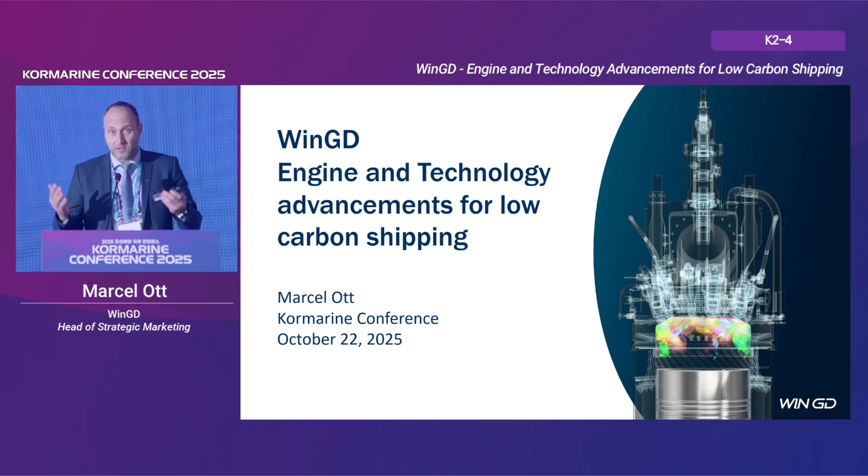I'm going to tell you something about WinGD's engine and technology advancements for low-carbon shipping, which is one of the very actual topics that all of us in this industry cover as of today.

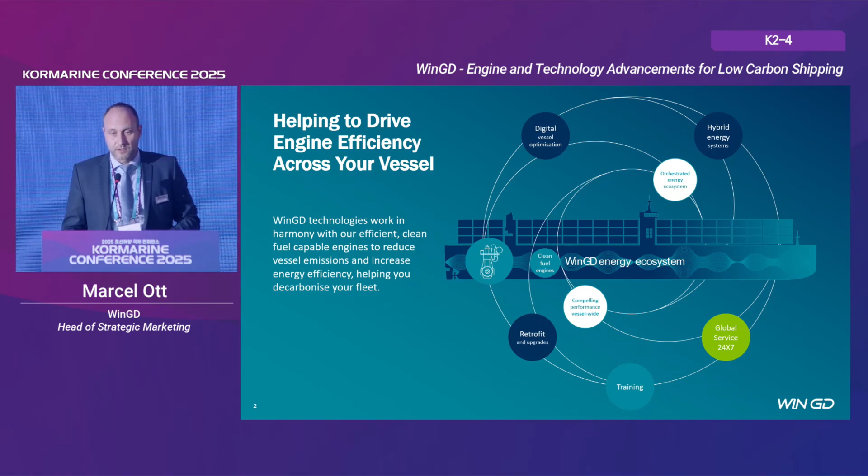WinGD is mostly known as a main engine designer, as many of you probably know. However, we also offer an extended range of technologies and solutions to support the decarbonization of the maritime industry, not only with engines, but also with other technologies such as hybrid power systems, or digital solutions that help to monitor operations and decarbonize or reduce fuel consumption and emissions overall.

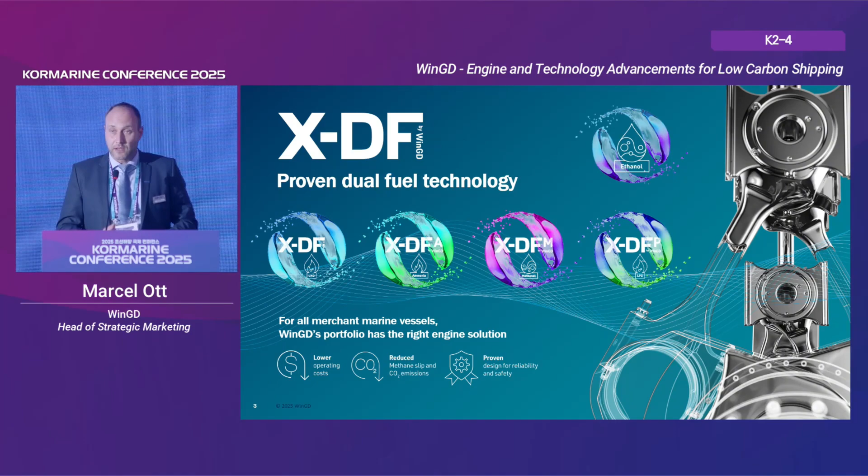In today's presentation, I would like to mostly focus on what we call future fuel or alternative fuel engines. We have the XDF LNG engines to start from, which is a very much established solution. On top of that, we have also introduced our XDF-A ammonia, XDF-M methanol, and XDF-P LPG burning engines. And just to add the latest one to this list, the ethanol burning engines, I will also have a word on that as we continue.

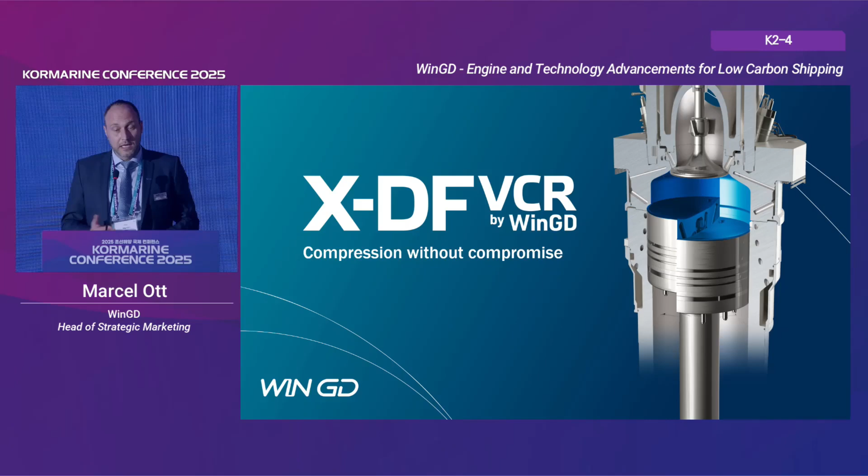So let's start with the LNG dual fuel and this variable compression ratio technology or device that we have introduced to this series of engines. It's actually quite much a groundbreaking technology that we have available for these engine types, because it gives flexibility that has never been there before on any combustion engine, basically.

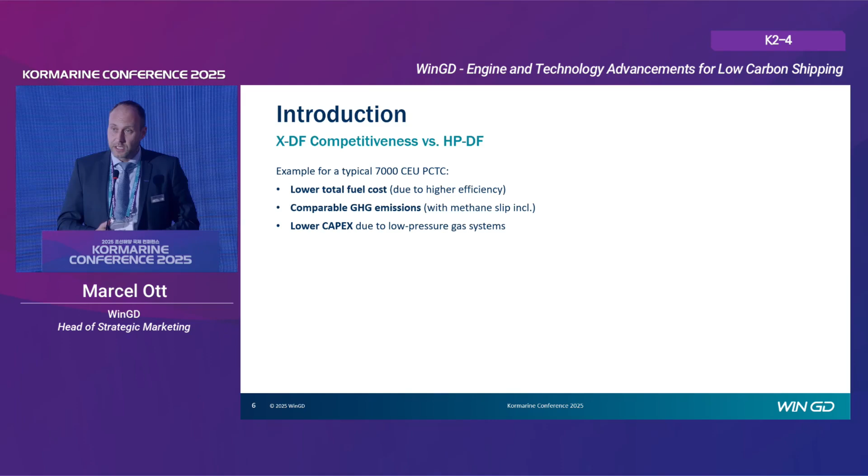The main target of this clearly is to offer the most competitive solutions in terms of LNG dual fuel. If we look at some of the main competitiveness parameters, as you can see here in a comparison of a number of versions of our low pressure lean burn Otto cycle engines compared to the high pressure counterpart, you can see that with this latest generation we can offer lower capex because they're still based on the low pressure gas supply system, which is more simple and more cost effective.

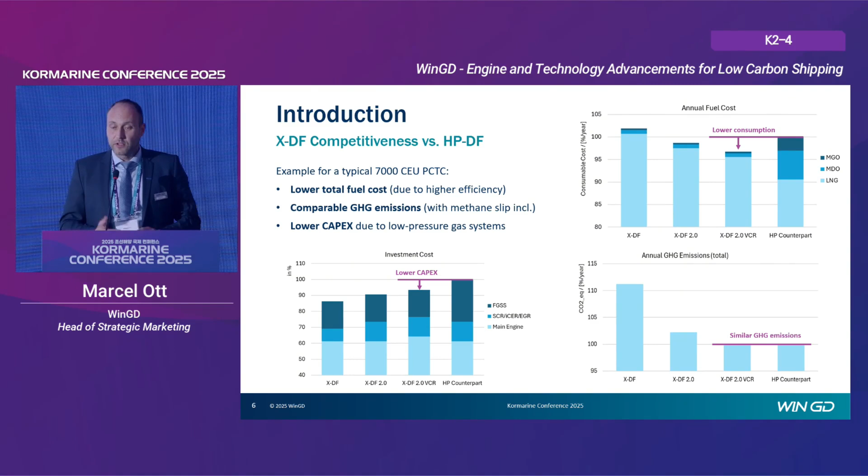We can lower overall fuel consumption, which is a surprise to many, but we see the technology is very effective when it comes to reducing fuel consumption. And even if we include methane slip, in terms of greenhouse gas emissions, the solution is very competitive.

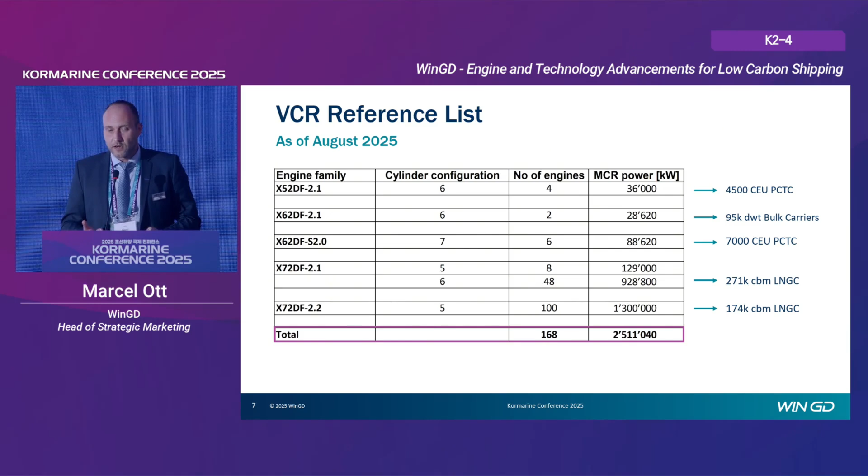We have seen a very good market uptake of this technology after its introduction. Our engine builders have contracted almost 170 engines with VCR technology in the last couple of years.

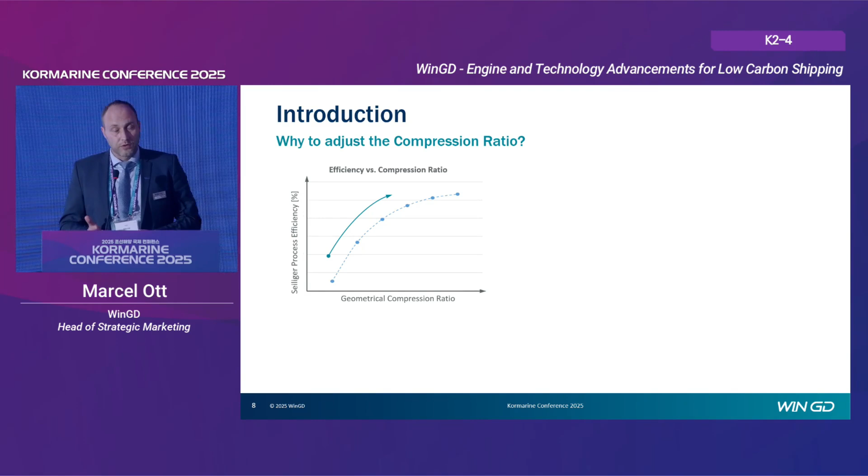First of all, why do we want to adjust the compression ratio on an engine? In very simple terms, on a combustion engine, the higher the compression ratio, the higher the efficiency of the engine and the lower the fuel consumption. So there is an interest to maximize the compression ratio of an engine.

That's a bit of a compromise, especially on a dual fuel engine that runs on two different types of fuels, where on a conventional engine without variable compression ratio, you always have a bit of a compromise in selecting the best compression ratio for operation on either fuel. That's an advantage with this VCR system.

We can maximize the compression ratio for any kind of operation. You can see here on this picture an example of the piston position at minimum and maximum compression ratio. That's the range we can use to optimize operation in any fuel mode, under any ambient condition, and with any gas quality. So it's an automatic optimization that takes place during the operation of the engine.

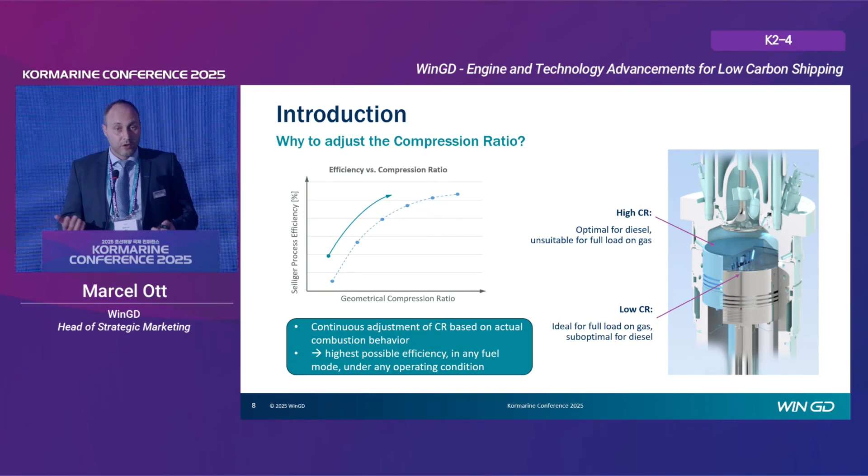There are a few main advantages or benefits with this technology. First of all, obviously reduced fuel consumption, and here you can see two illustrations showing the consumption savings in diesel and gas mode. We're talking about quite significant savings. In diesel mode, something like 6 or 7% of fuel savings, so it's quite significant. And also in gas mode, in part load, we have reduced consumption.

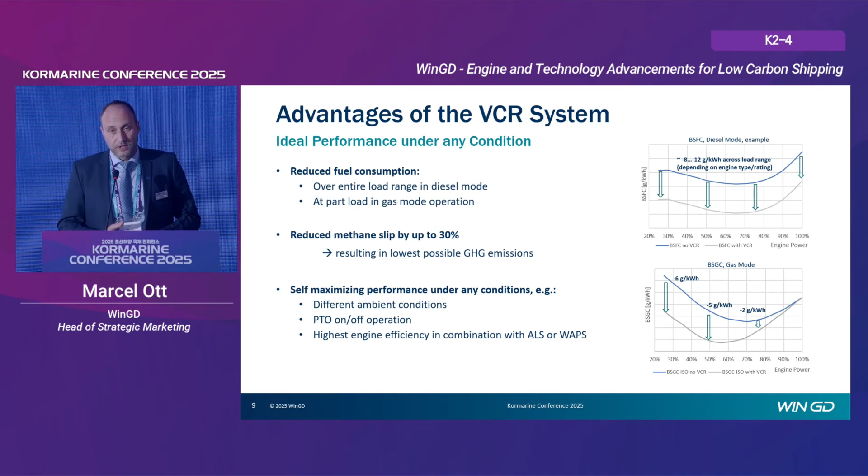We have seen reduced methane slip of approximately 30% compared to previous generations of engines, which results in lower greenhouse gas emissions. We also have additional flexibility to maximize performance under different operating conditions. These two pictures show how this mechanism looks like.

To the left, you can see this knee lever connection feeding hydraulic oil into the crosshead of the engine. Inside the crosshead pin, we have this hydraulic mechanism that consists of something like a hydraulic piston inside the pin.

By controlling the filling level of this lower chamber, we can adjust the position of the piston fully variably during operation of the engine. And that actually happens automatically, so the crew does not need to do anything besides just making sure that the system is activated.

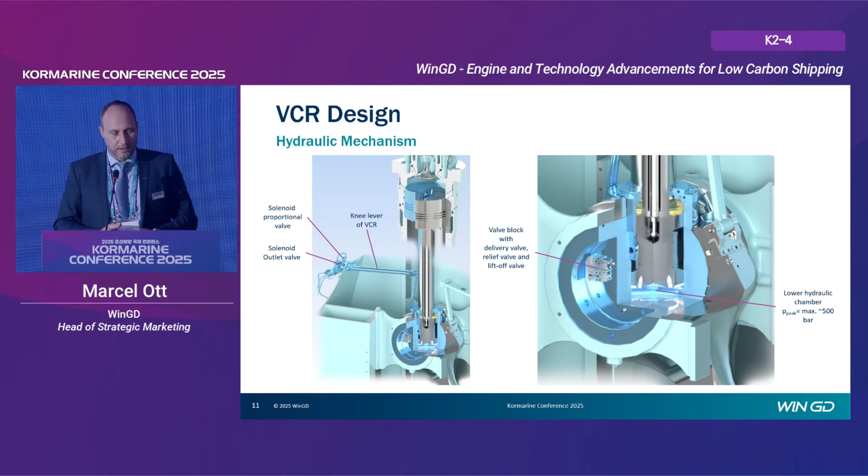The status of the introduction of this technology is that our engine builders have started to deliver a number of engines. Different types of engines have been delivered from Japanese, but also Korean engine builders now. The system is fully type approval tested by all major classification societies.

I mentioned methane slip before, and I would like to put this into a number. We have seen that this latest 72-bore engine type has reached a methane slip level of 0.7% of the gas consumption, and that is significantly lower than what is typically used as a default factor in European Union or IMO regulations. So very much an advantage here.

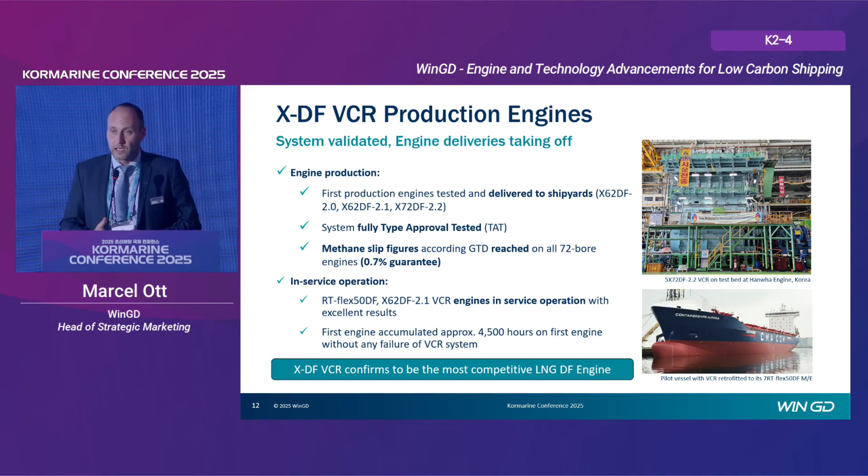We also have a number of engines in service. The first engine that has actually been converted during a dry dock as a pilot or test installation has accumulated about 4,500 running hours without any failure of the system. That has been very good operational feedback, and with this we are confident to state that with VCR, the engines actually become the most competitive LNG dual fuel engines in the market.

So that was the first topic. Let's move on to the XDF-M methanol burning engine, another type of engine that we have developed and introduced to the market. Here is a summary of reference projects - contracted projects. You can see we have totally contracted 76 sets of engines, and many of them are of a large bore type, 82 or 92 centimeter bore types, which are typical applications on large container vessels.

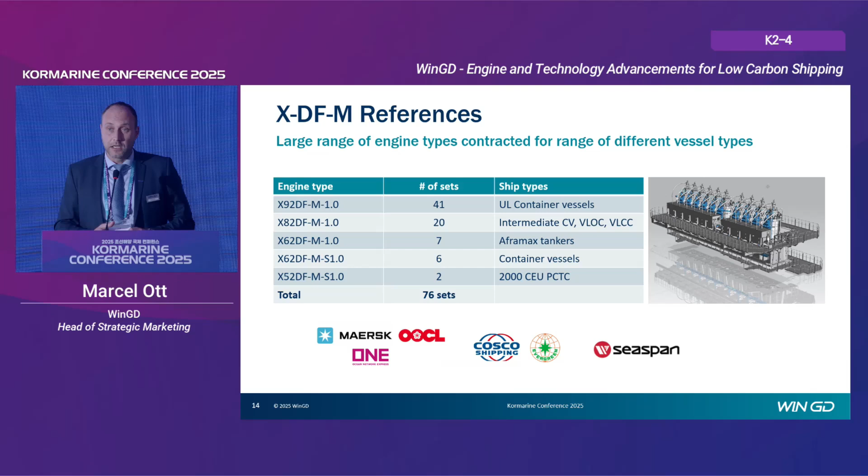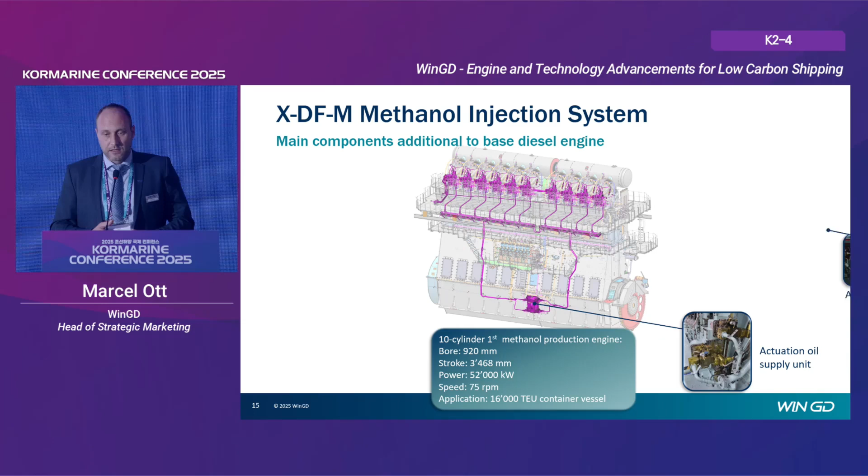First application was on a 92-bore 10-cylinder engine, a big engine with more than 50 megawatt of power output, powering a 16,000 TEU container vessel. Here just a few illustrations of the components of the system and how that looks in reality.

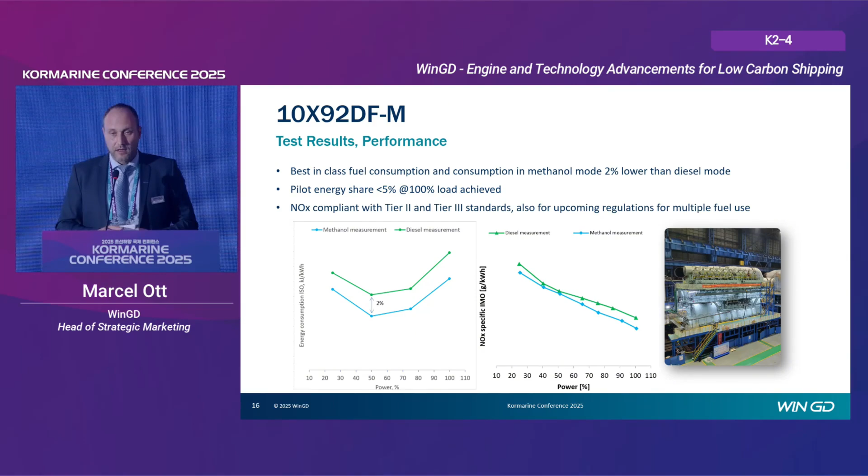Talking about test results in terms of performance, they have been very positive. We have seen that our performance predictions were fully met, fully in line with our performance predictions and guarantees. Interestingly, in methanol mode the consumption is actually lower than a diesel engine - about 2% lower, which comes from a lower NOx production during operation on methanol, allowing the engine to be somewhat more fuel optimized compared to a regular diesel engine.

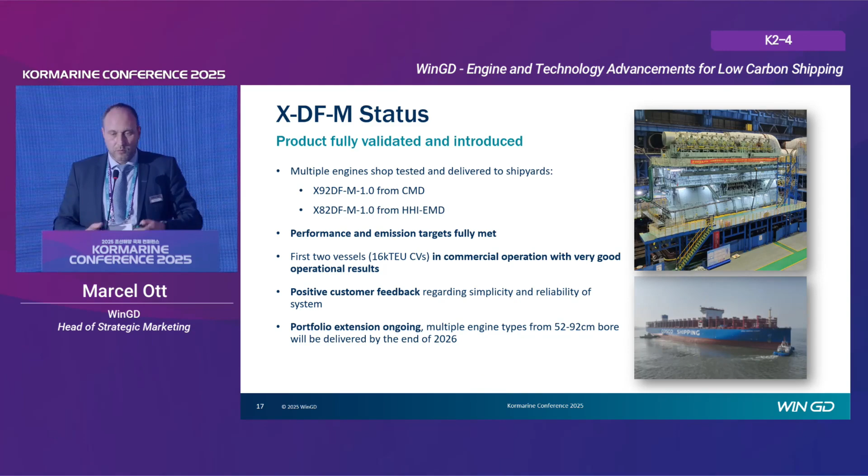Also here, two different engine types have been delivered, 82 and 92 bore. As I said, performance targets were fully met, and first vessels are now in operation with very good feedback so far. The portfolio extension is ongoing, so by end of next year we will have engines delivered in the range of 52-92 bore, covering our full bore size range of two-stroke engines that we offer.

Now moving to ethanol as fuel, which is actually very closely connected to the methanol engines. Ethanol as fuel is something that in the recent year has grown massively in terms of interest. We receive a lot of inquiries about ethanol as fuel, and much of that comes from the fact that ship owners who have ordered methanol-fueled vessels realize that green methanol is at this moment, and in the foreseeable future, not available in reasonable quantity.

Ethanol, though, is in a way a very similar fuel. It's also an alcohol, same as methanol, and in many aspects it's very much comparable. The biggest difference from an engine point of view is a difference in heat value - the quantity of fuel that you store in the tanks and burn in the engine is somewhat lower compared to methanol because it has a higher energy density.

The ethanol engine is fully based on the methanol design, so there is no major design difference. It's important to understand that the engine can operate on both fuels, running on ethanol or methanol, and that is what we believe is the key enabler for a faster uptake of these types of engines, because you have a much better coverage of fuel availability. We expect first engine deliveries possible from 2027.

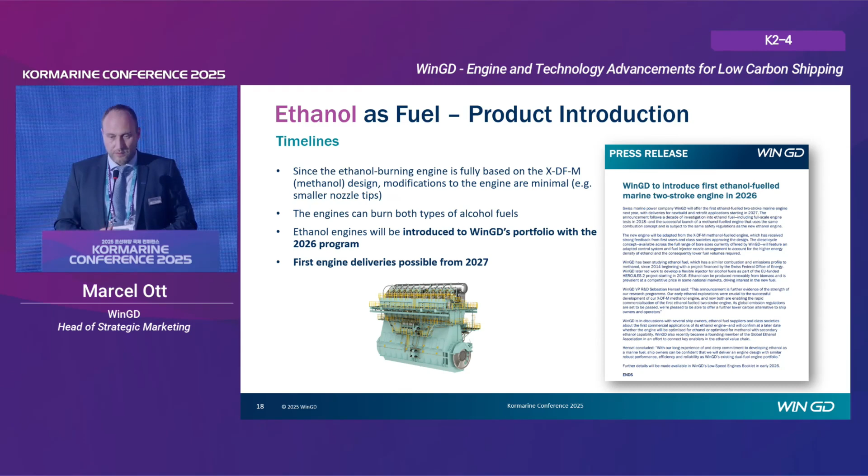Ammonia engines, another very interesting topic which we believe in the long term is going to be one of the major solutions in the market, simply because ammonia is a carbon-free fuel. And the production of ammonia is therefore a lot more simple and cost-effective compared to other green or synthetic fuels, such as green methanol. For ammonia engines, we offer a number of engine types now from 52 to 82 bore.

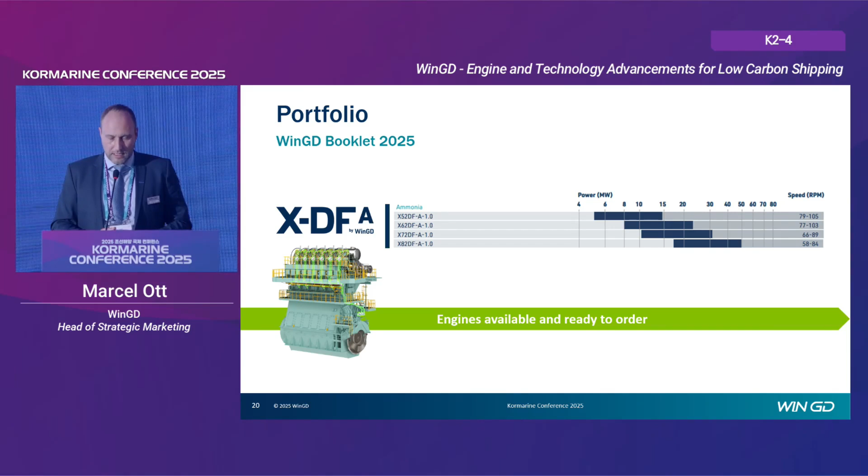Up to 50 megawatts of power. And the engines that you see here are available in our program, and they can be ordered at our licensees. Again here, a list of reference projects.

Here are a few selected performance results. We have seen from the testing that engine efficiency is comparable to a conventional diesel engine, so we have a very high efficiency also when running on ammonia. Combustion stability is very good, and maybe that is one of the key findings, that ammonia as a fuel is very well suitable for a two-stroke engine.

A lot of people were concerned that ammonia, which is more difficult to ignite and has a lower flame speed compared to other fuels, would create problems when using it as a fuel on a combustion engine. But what we have learned is that these properties actually fit very well to a slow-speed two-stroke engine, because we have a very slow engine. Having a low combustion speed is actually beneficial and fits very well to the requirements of a low-speed two-stroke engine.

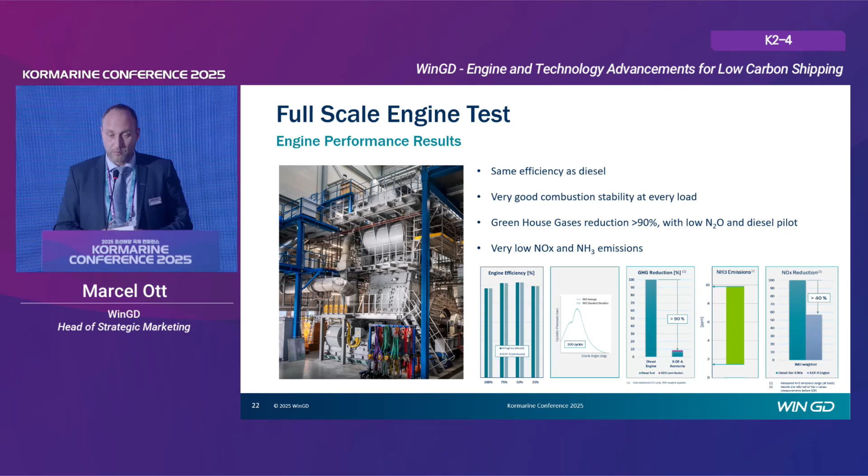The status of that introduction is that the first of these engines was tested here in Korea by HHI-EMD and delivered to the shipyard. It's currently being installed. The second engine is under testing, and we will conduct type approval testing on that engine very soon.

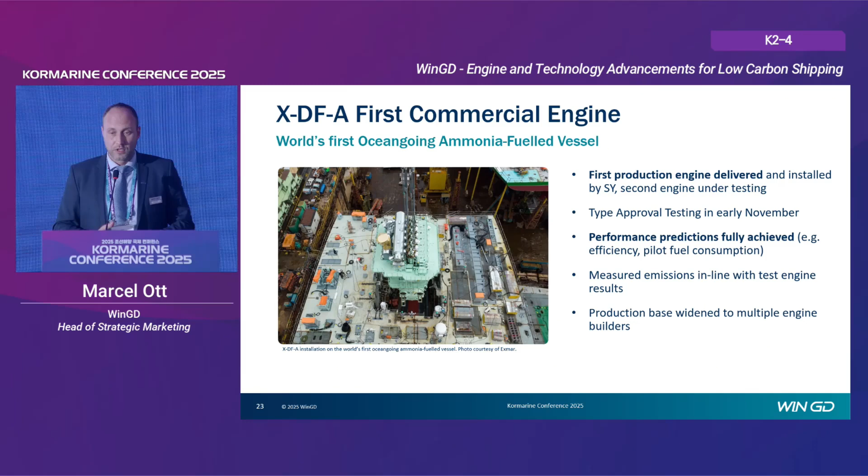Performance predictions are fully met. As said, the performance results were very good and promising for all future deliveries also. Same with emission test results.

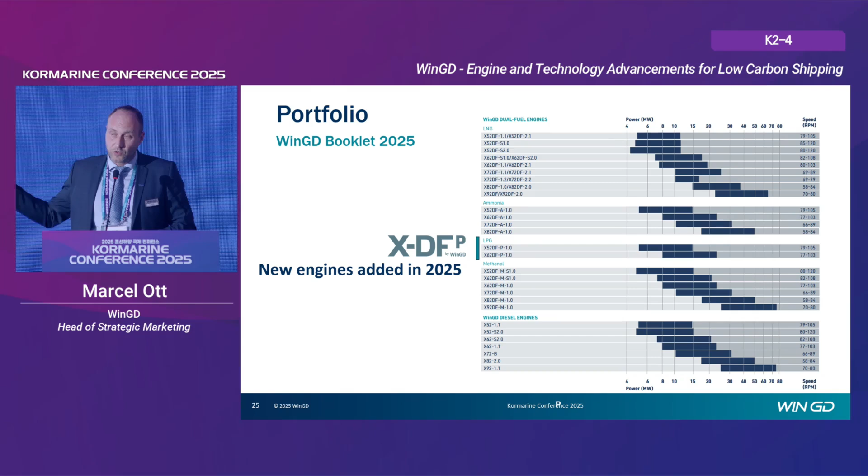Then a few words on the XDF-P, the LPG burning type. And here I have to say these engines are fully based on the ammonia engine design. The intention here is that we focus very clearly on the market segment of gas carriers, so MGC, VLAC, VLGC type vessels, and that is why we have these two engine types, 52 and 62 bore, available in our program.

So it's the same injection system as what we have on the ammonia engine, and what we are targeting is to offer a very simple upgrade from LPG to ammonia at some point in time. We see many of these ships are expected to carry LPG as cargo for the first few years.

After a few years, if the owner has any plans to change cargo from LPG to ammonia, we want to enable a very simple conversion of the engine to also be upgraded for ammonia operation. And that is possible because the engines are already designed as ammonia engines in the first place.

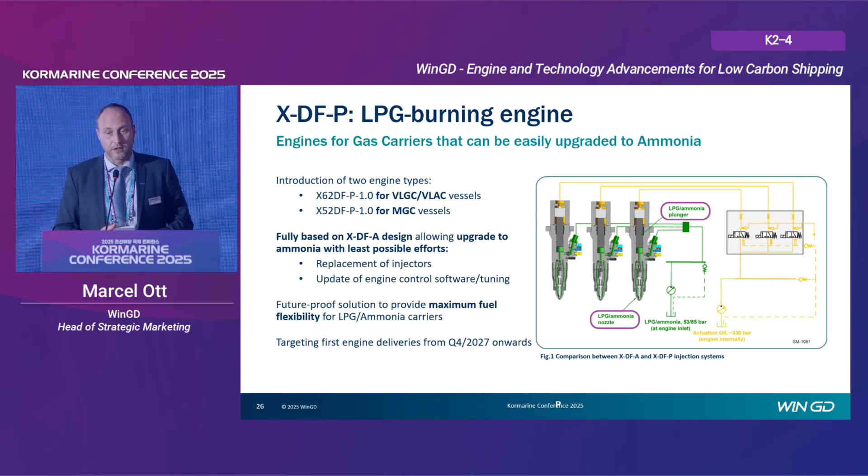So this is expected to give maximum flexibility for owners and operators to adjust their selection of fuel according to the cargo they carry. So that was about the engine part, and now I have one last slide on our WiDE system, as we call it, just to give a little bit of an impression of what we do besides all the engine design. WiDE is our digital platform.

It's called the WinGD Integrated Digital Experts. It's basically a data collection and monitoring system that also analyzes data on board, then also sends reporting data ashore. And the idea here is that you basically have a system that monitors engine operation.

It gives advice on any kind of adjustments or improvements that should be done to optimize efficiency, reduce fuel consumption, but also if there is something that doesn't operate as planned, and in order to avoid any unplanned downtime or repairs, the system can already give predictive indications if something is not going well.

This system, we see, gives a lot of extra information to the operating crew on board, to the ship managers on shore, but then also to WinGD, as far as we are allowed to have the data from the owner, because the data belongs to the owner.

But if we're allowed to receive that data, we can also help with troubleshooting, for example, or operational advice. Again, with one target to reduce fuel consumption and reduce emissions.